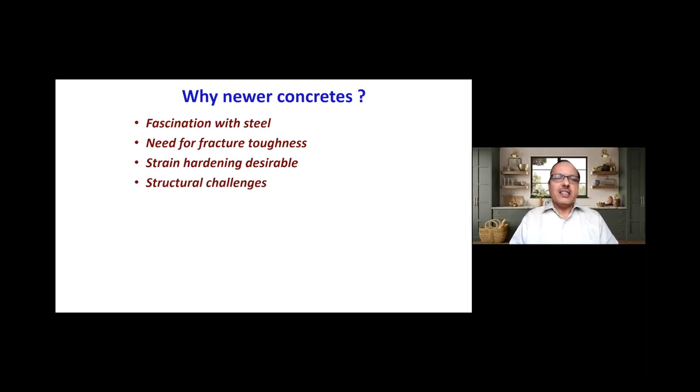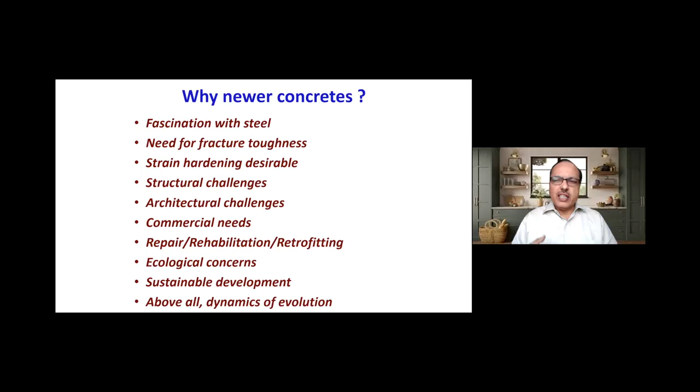We always have lots of structural and architectural challenges in our structures, and of course commercial needs is always a guiding factor. Today it is not only construction, but even repair, rehabilitation, and retrofitting of structures is an important component of our construction. Ecological concerns are important too - everyone wants green or eco-friendly constructions, so what varieties of concrete will cater to that? More than all that, we talk about sustainable development, and the dynamics of evolution ensure everything keeps changing. Change is the only constant in life.

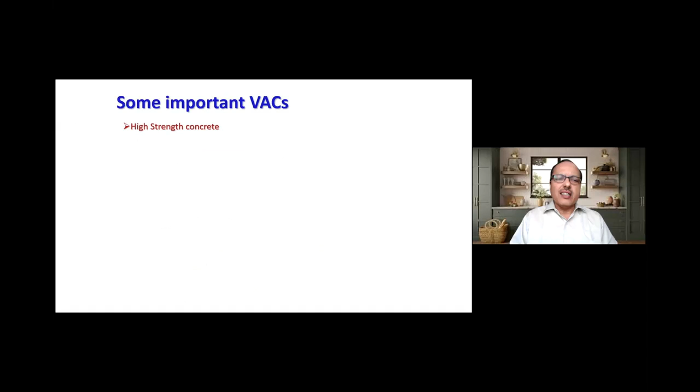There are several value-added concretes, that is what VAC means. I will not get into each one of them - there are so many varieties of value-added concretes. Some of them which are important for today's situation in construction, I will take you through.

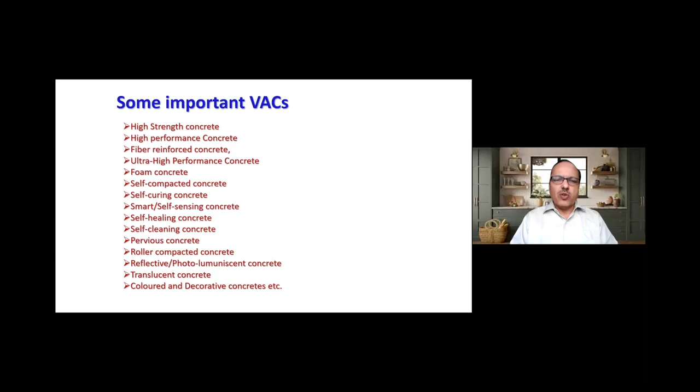Mainly, my presentation would focus on special concretes for structures related to housing and infrastructure projects. Infrastructure projects include roads and bridges and so on. Housing can be individual housing or mass housing.

Now let us start with the precast construction that we have today in the mass housing sector. A lot of precasting is happening in our construction these days, and particularly in mass housing its usage is increasing day by day. I'll take you through one of the very challenging precast constructions that we had some time back.

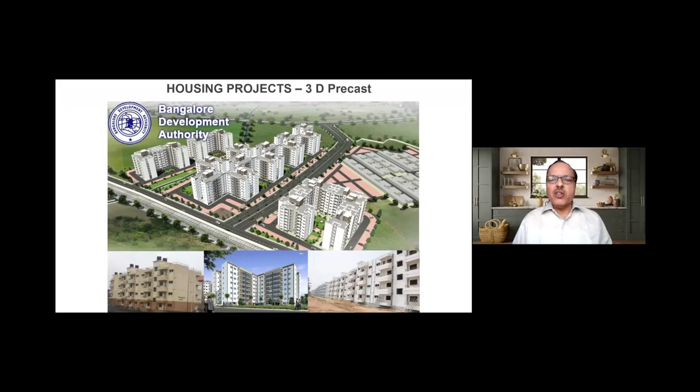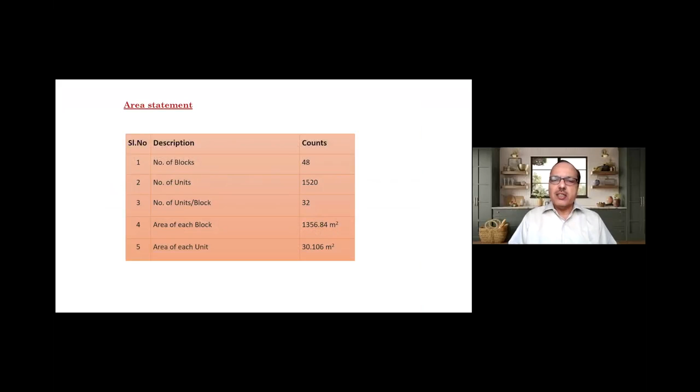BDA, the Bangalore Development Authority, two years back conceived the idea of coming up with 3D precasting. Two-dimensional precasting everybody knows - they thought of coming up with three-dimensional precasting. They wanted to build more than 1,500 houses in 48 blocks, 32 units per block, and roughly the area of each house was around 400 or slightly less than 400 square feet.

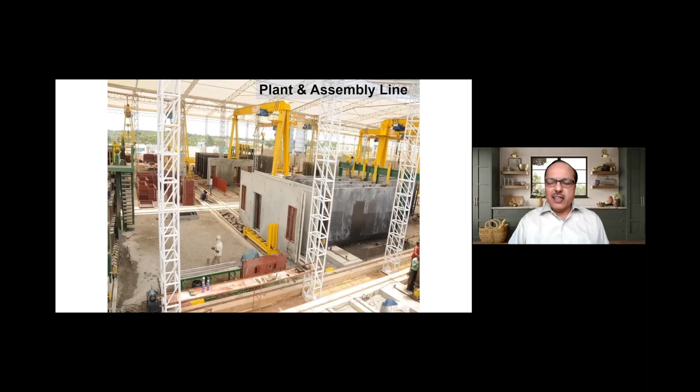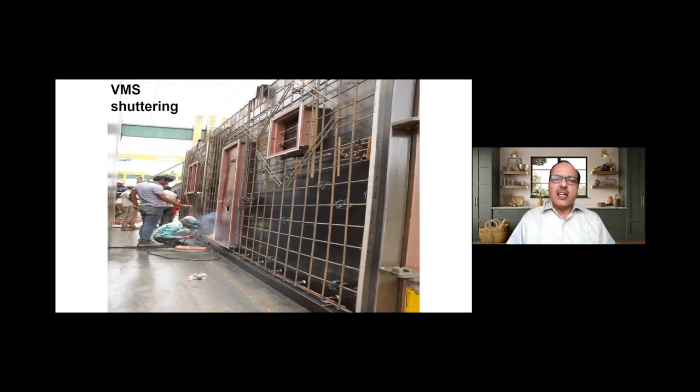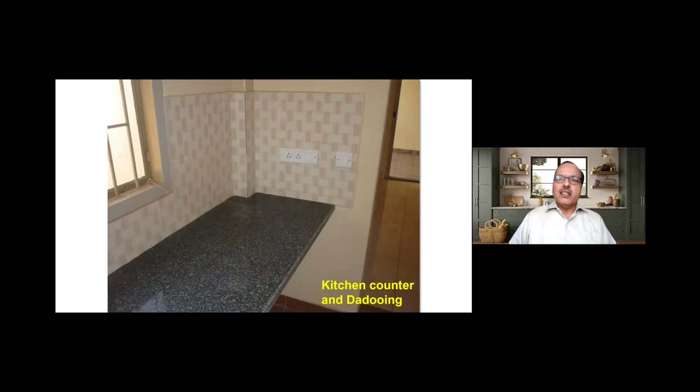This is a wall being constructed with single line reinforcement for the walls, normal reinforcement for the roof. Not only the basic construction, but also the kitchen slab, electric points, tile fixing - everything is done in the plant itself, in the factory itself. Even your washroom fittings and bathroom fittings are all fitted into this.

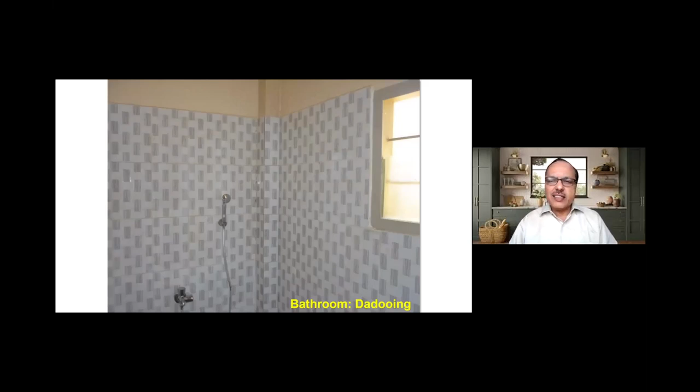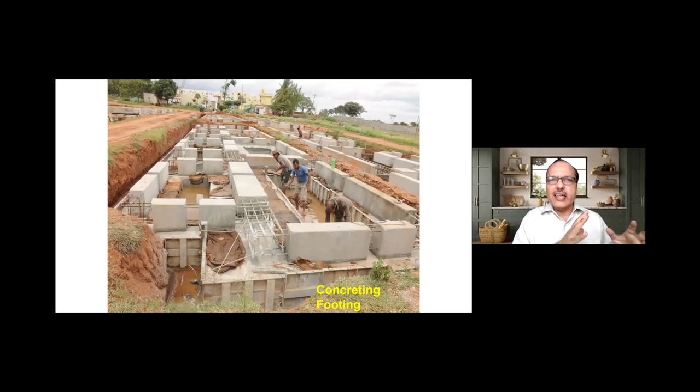Please note, this house is ready, but not ready at the site - it is ready in the factory. Now, how does it go to the site? When we are doing this construction in the factory, the substructure, that is the foundation, is constructed again using precast blocks which are transferred to the site, and the foundation is kept ready. Therefore, you have the foundation getting ready at the site while the house is getting ready at the plant or the factory.

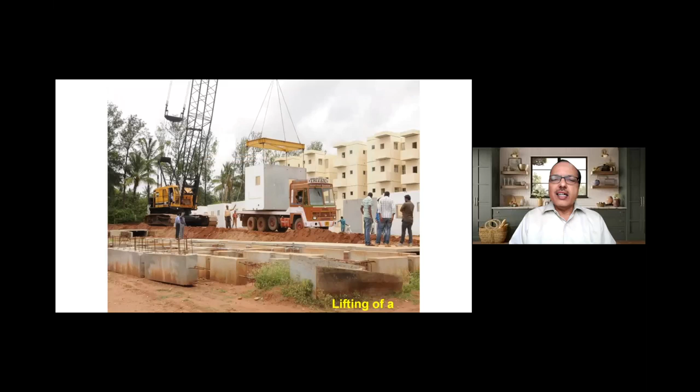Now parts of the house are transported part by part. Roughly about 180 to 200 square feet of the house is transported, and it is taken to the site, lifted and placed. Now what is important is this anchorage - when the structure is brought and fitted into the foundation below, how it is anchored is a challenge. There were a lot of challenges, but it was overcome with a series of trials. The requirement for concrete in this case is that it should get a high early strength so that we'll be able to handle it.

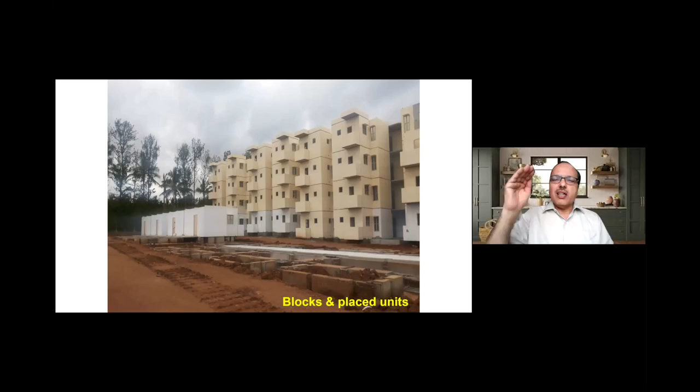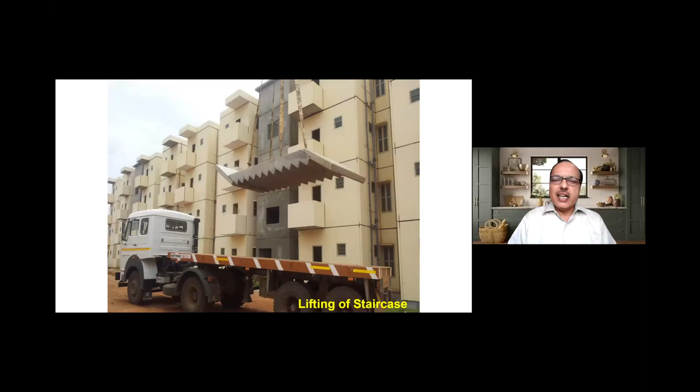One above the other, like a matchbox, the entire structure is ready and the blocks are all placed one above the other. The house is ready. Even the staircases are fitted like that - if it is a dogleg staircase, two pieces are brought and assembled, and within 2 hours the staircase is ready. This is the story of precast construction in mass housing projects, and you can see how fast things can be if it is done in a factory.

Now another way of construction is cast-in-situ construction. If you have in mind that precast construction is faster and cast-in-situ construction is very slow, this is one example of a mass housing project where cast-in-situ construction can still make it quite a fast project.

Before we get into the case study, let us look at the specialty of the concrete used here - what is called foam concrete. Foam concrete is not a very high strength concrete. It is a low density concrete, very easy to operate, very easy to pump. Its strength is hardly M15, and that is good enough because we are replacing brick walls with this foam concrete. If it has 15 MPa strength, that is much more than sufficient. It is a lightweight concrete - its density is not 2,400, it is hardly 1,000 to 1,200, and it can be brought down to 800 kg per meter cube also, one-third the weight of normal concrete.

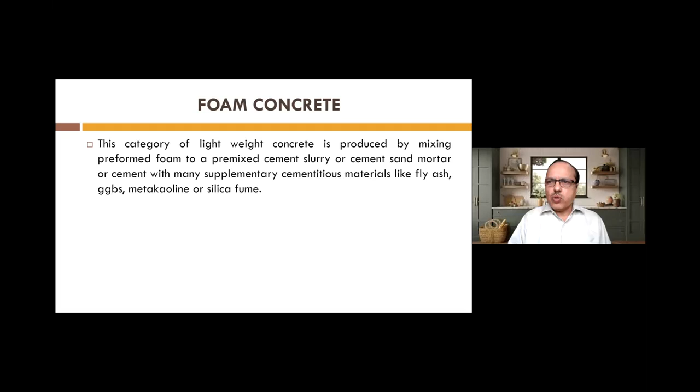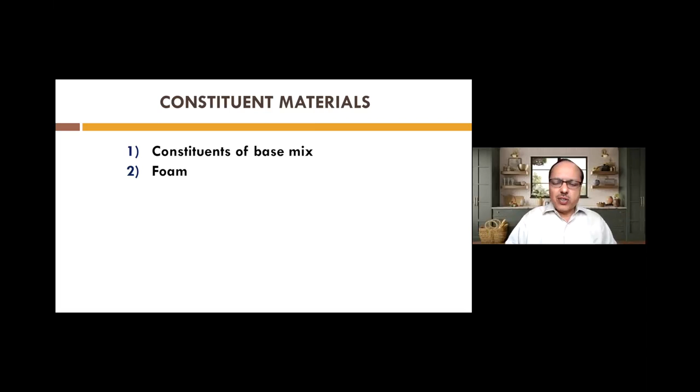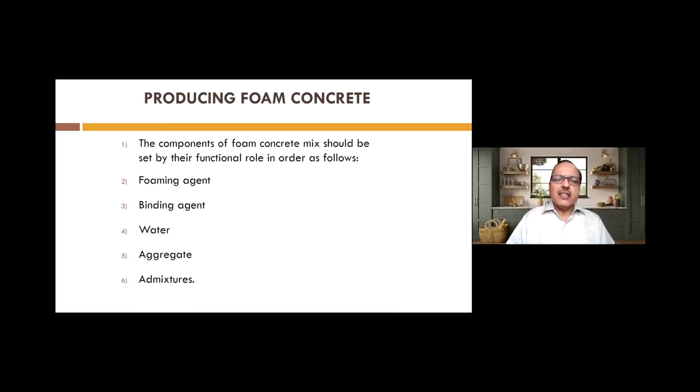What are the constituents of this? What is special about it? It has got a base mix very similar to normal concrete, and it has got foam added into it - that is why it is called foam concrete. The base mix is OPC or PPC added to make a good homogeneous mix. These are produced by adding sand and aggregates in the usual way, and the strength design is hardly for M15 concrete. Finally, you add a foaming agent, binding agent, water, aggregates, admixtures if required, etc.

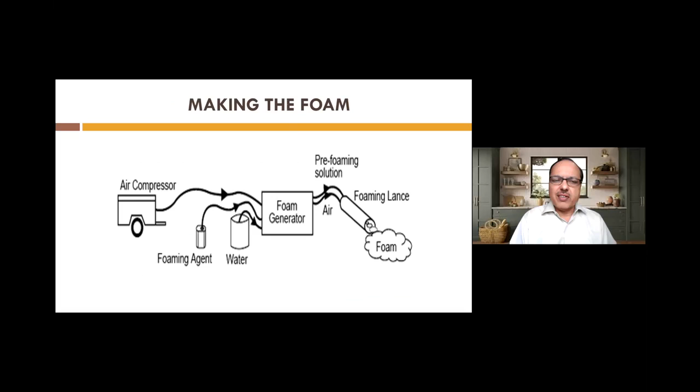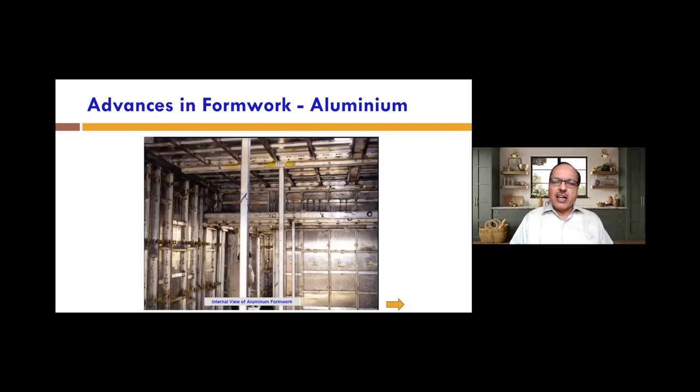Now let us come to the construction. Aluminum formwork and foam concrete make an excellent combination. Aluminum formwork, though initially expensive, can be reused nearly 200 times, which makes the total expenditure life cost analysis much more affordable. With this aluminum formwork the finishing is also very good, and foam concrete makes it an ideal combination.

This is the story of a ground plus 3-storied structure in Ahmedabad. The entire superstructure was constructed at the rate of 4 days per floor - 4 days per floor into 4 floors, 4 into 4 is 16. Simple mathematics - in 16 days the entire ground plus 3 superstructure was ready.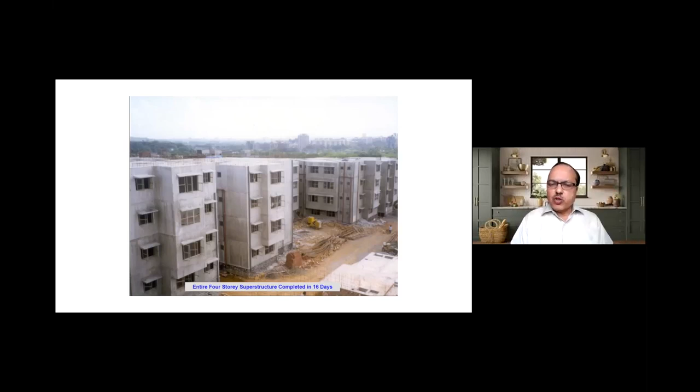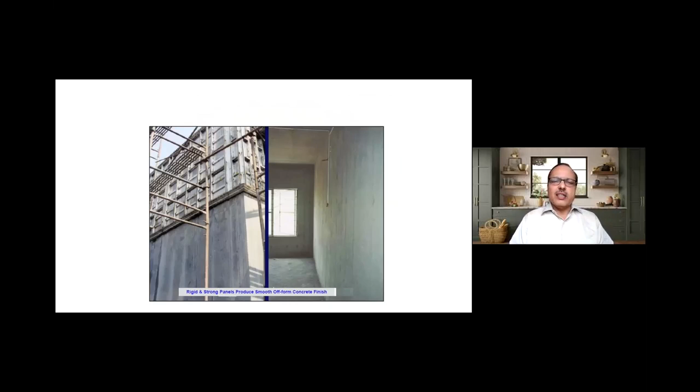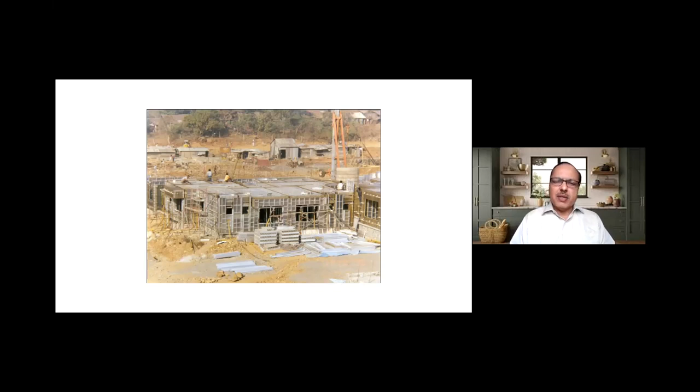Only electrical and sanitary fittings had to be done. How was this possible? Because it is aluminum formwork, the external face and the internal finish you get don't need plastering - it is a plaster-free structure. It is very smooth and doesn't require plastering, so you save a lot of time. The entire formwork is done by very few people, which is very ideal in the current situation where having trained, skilled labor is a very difficult thing nowadays. Therefore very few people can handle this.

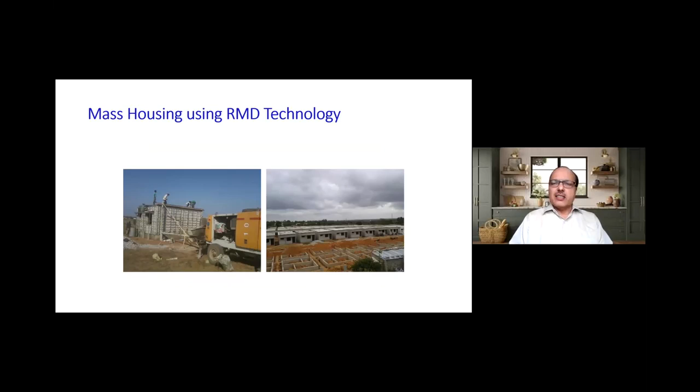I'll take you through one of the projects that we did, that Ultratech was involved in a few years back. That was in a village near Gadag.

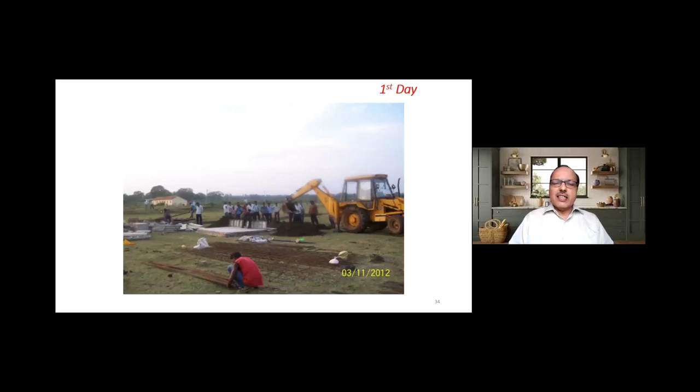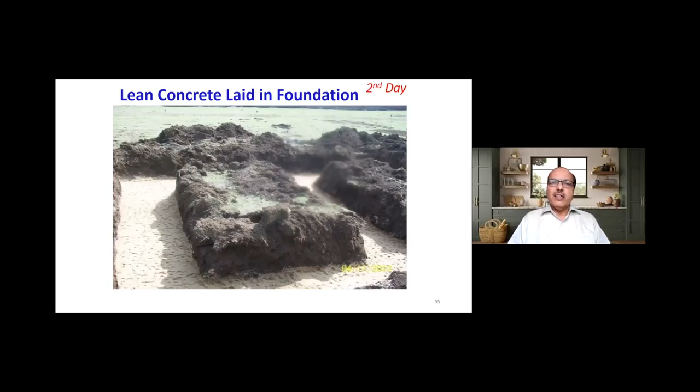Now this is the place where we started this work, and this was day one. Day one was excavation. Day two was laying the lean concrete foundation. And third day, it was foundation up to the plinth.

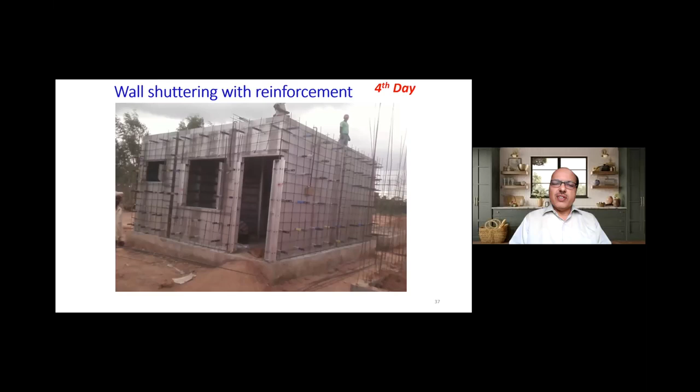Fourth day, aluminum shuttering and one layer of single layer reinforcement for the walls and normal reinforcement for the roof. The whole thing was laid. It is very easy to do that, very fast also. Half a day, the work was over.

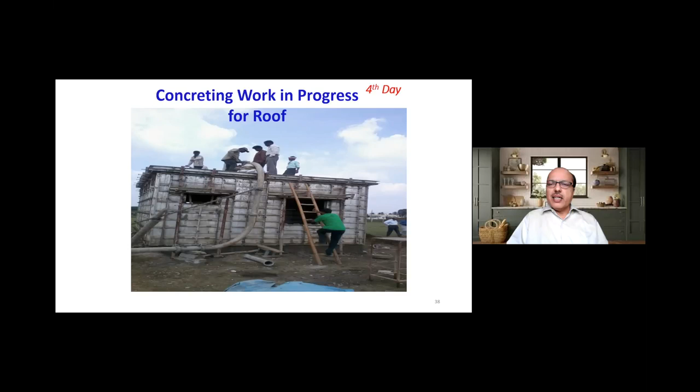Therefore, the entire box of concrete, both the roof as well as the walls, can be cast together. Therefore, it acts like a shell structure, a reinforced concrete shell structure. And because it is foam concrete, your concerns regarding the temperature inside, thermal conductivity, etc., are addressed. Foam concrete is much better as far as thermal conduction is concerned.

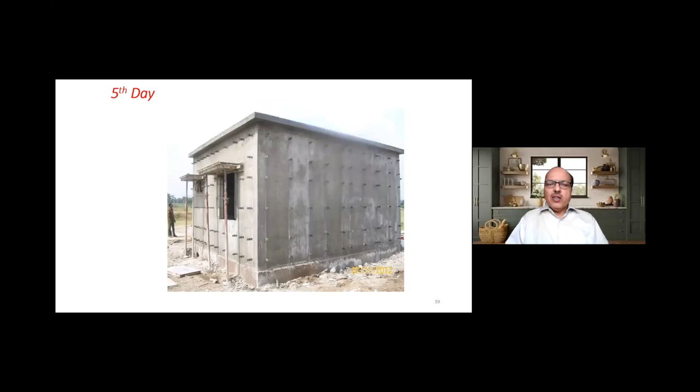Now this is the fifth day when all the side props are removed. Only the vertical props are remaining. Sixth day, the house is ready for opening. And seventh day morning, when the then Chief Minister came to the site to lay the foundation stone, he saw one building was already ready and he inaugurated that building.

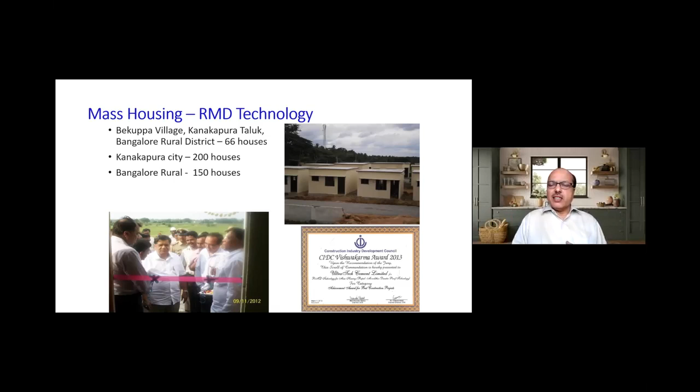And for promoting this fast construction technology, we also got this CIDC Vishwakarma Award. That was in 2013. Now, one more addition to this was done later on in the VBHC project Bangalore, where 1,800 apartments were constructed.

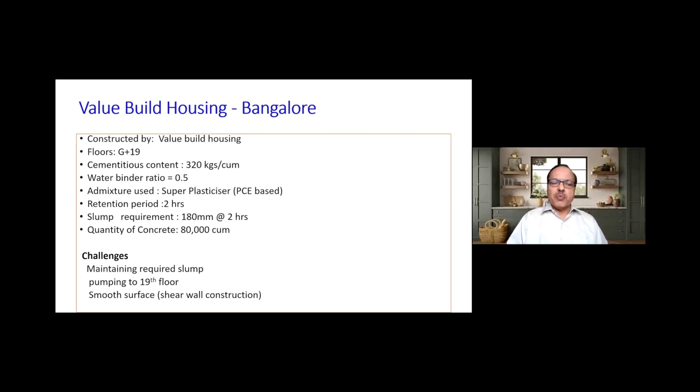The challenge here was also to see how much strength we get in one day. Therefore, the challenge was to maintain the required slump, because pumping of concrete was to the 19th floor, and also to ensure that a smooth surface is there for the shear wall construction. About 80,000 cubic meters of concrete was produced under this kind of condition or challenge.

So we used what is called a wireless maturity meter system. What does this do? When concrete is poured into its place, the formwork, the aluminum formwork, we also drop certain sensors. These sensors, when dropped into concrete, measure the maturity of concrete. This maturity of concrete can be gauged with the help of this wireless maturity meter system.

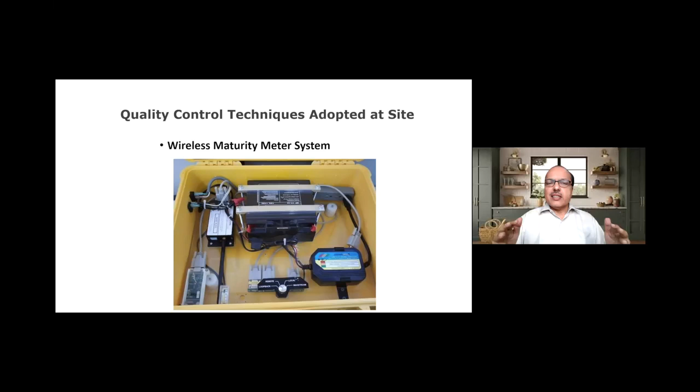It is a wireless system. You don't have to draw the wires, and it is captured at the office, and you can correlate it to the strength of concrete. That means these sensors inside concrete are able to tell you what is the strength of concrete inside.

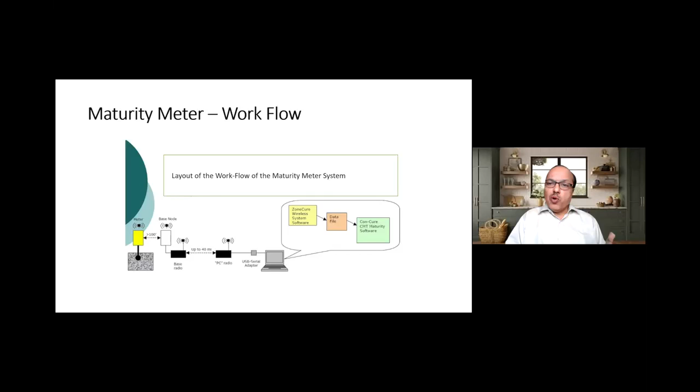Whatever we designed for 24 hours, we found that the concrete had already achieved the one-day strength in about 15 to 16 hours. This wireless maturity meter was able to tell us that in 16 hours, the strength is obtained, and therefore you can remove the shuttering and go to the next floor. This makes the entire system much more efficient than one-day strength. That is the additional thing we did in the VBHC project using the maturity meter.

Now let us move on to high strength concretes. From low strength concrete, we will now go to high strength concretes. High strength concretes are used in a lot of projects, particularly infrastructure projects, road projects. We use a lot of high strength concrete structures. I'll take you through some of these examples.

Why is it required? It is required for facilitating pre-stressed concrete construction. For stressing the concrete, it is required to have early day strength.

We need to have a flow of 450 millimeters. Slump is measured not in verticals but in horizontal flow. In 3 hours, it should have 450 millimeters slump. Now, it is not just one pour of concrete that we should ensure; all the 65,000 cubic meters of concrete should have this property.

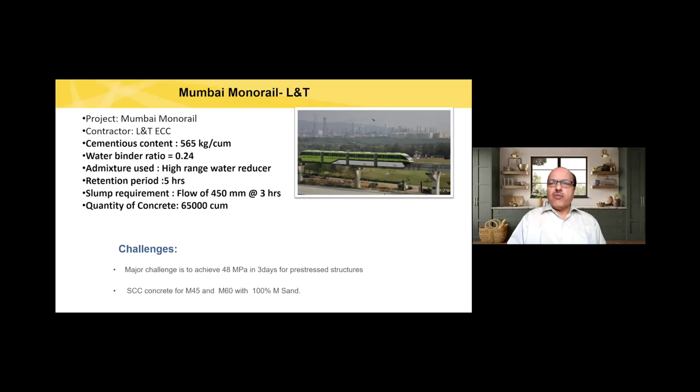And in this whole thing, M sand was used. I want to make this statement: M sand, a lot of engineers have apprehension even today, but there is no such issue. The only condition is that M sand should satisfy the conditions prescribed as per IS 383. It is very good for structures, and you will get consistent strength in the structures.

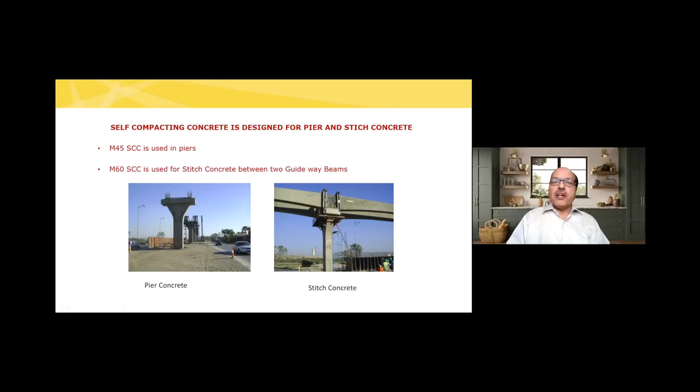This is the pier concrete for which M45 grade concrete was used. And for the stitch concrete between the two beams, the two guideway beams and the pier, you had M60 grade of concrete. That was the stitch concrete. It is a self-compacting concrete; M45 and M60 were used for this project. This is a finished project, very good finish and excellent performance.

Now, high strength concrete is all right. High rise pumping concretes - now we'll have to pump concrete to great heights. All of us know that Burj Khalifa is the best example we have till now, where concrete has been pumped to a height of 550 meters, that means more than half a kilometer's height.

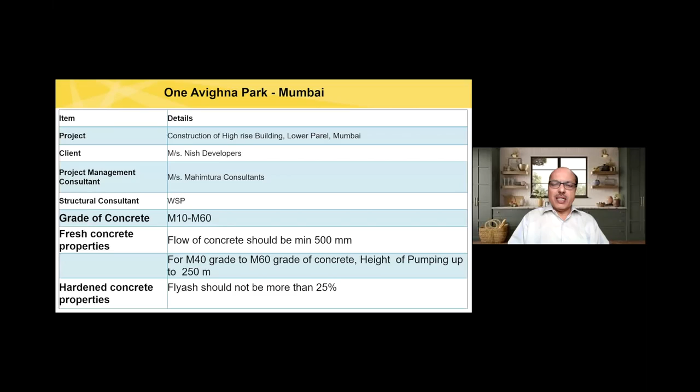But in India, right now, the record pumping is 250 meters, that is 1/4 of a kilometer. The example is this Avighna Park in Mumbai, where different grades of concrete from M10 to M60 were used. Flow of concrete was 500 millimeters, and with about less than 25% of fly ash, concrete was made, with about 595 kg per cubic meter.

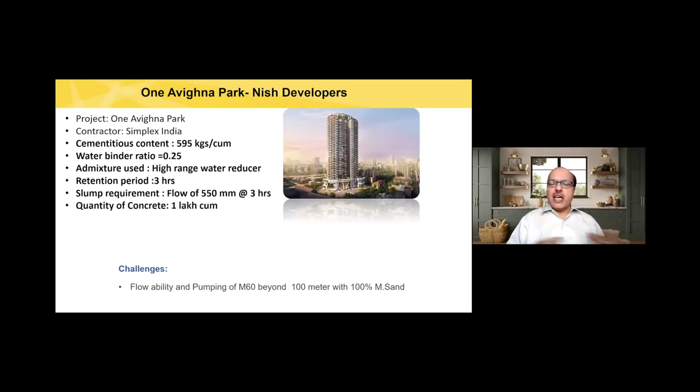The challenge here is that flowability should be so high, more than 500 millimeters after 3 hours, so that we should be able to pump it beyond 100 meters with 100% M sand. This was possible to make. And what was the quantity of concrete? 1 lakh cubic meters of concrete with the same kind of property. It is now possible to make with the mechanization that is available.

Now, another example of high strength concrete is for roads. Concrete roads - there are a lot of concrete roads, and white topping is becoming very popular in many places. White topping, those in Bangalore and Mumbai may say it is taking a lot of time, but let me assure you, the time taken is not for making the concrete road itself, but for all other reasons other than making the structure.

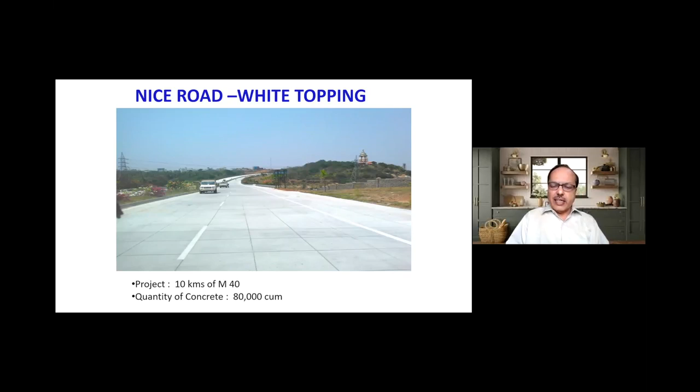Now, this is the quite well-known NICE road. Those familiar with Bangalore must be aware of this - the outer periphery road, that is NICE road, which is made with M40 concrete. About 80,000 cubic meters of concrete was used for about 10 kilometers of that. M40 grade of concrete with fibers.

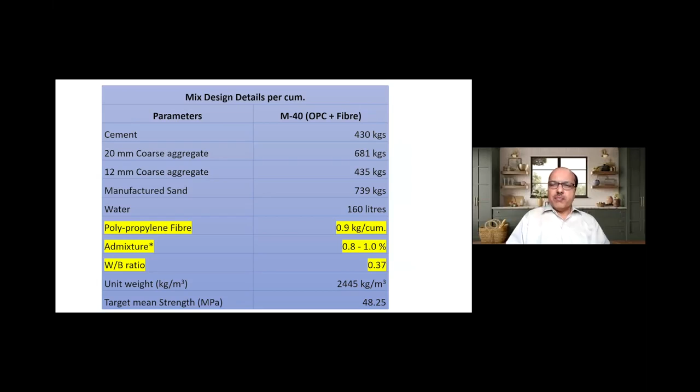In case of concrete roads, please note, fibers are desirable - I would say essential, at the rate of 0.9 kg per meter cube, so that it helps in the control of cracks. Otherwise, plastic shrinkage cracks - you will see a huge number of such cracks coming up on the structure.

Now, this is about cast in situ concrete. Concrete can be made just like in housing, concrete can be precast also. If you make it precast concrete, which is not very popular in our country, it is possible to make it precast, pre-stressed concrete pavement. The great advantage is that the pavement components are made in the factory, brought to the site, and assembled.

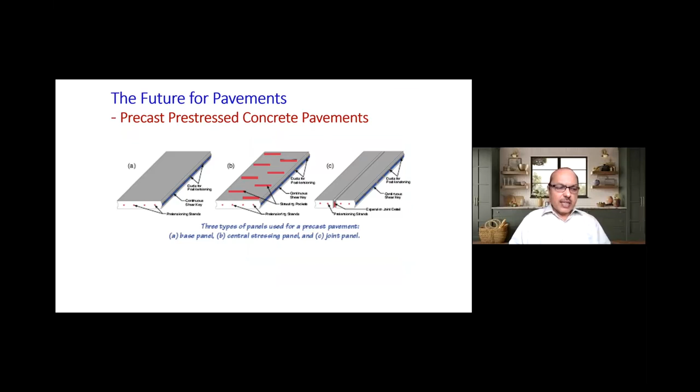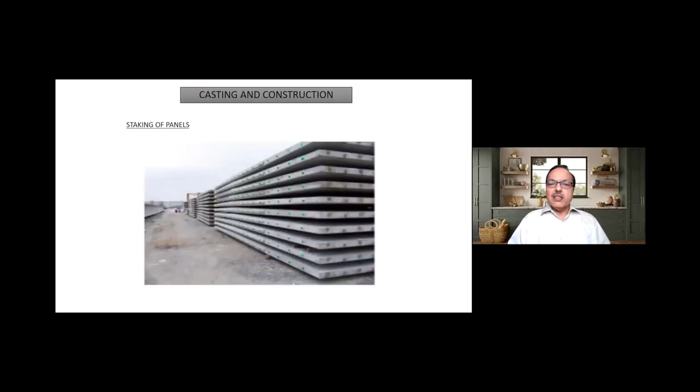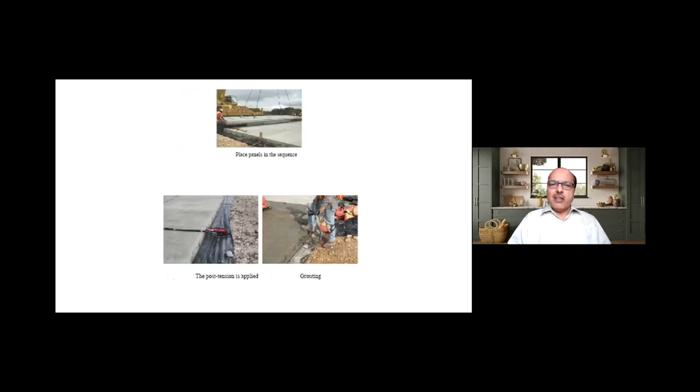Now, this is a story of a road which was closed for traffic in the late evening, and within 12 hours - because these panels were already ready, kept by the side - they were just assembled, the joints were completed in the morning, and grouted, all the joints were grouted, and painting was also done in the factory, and the road was opened within 24 hours.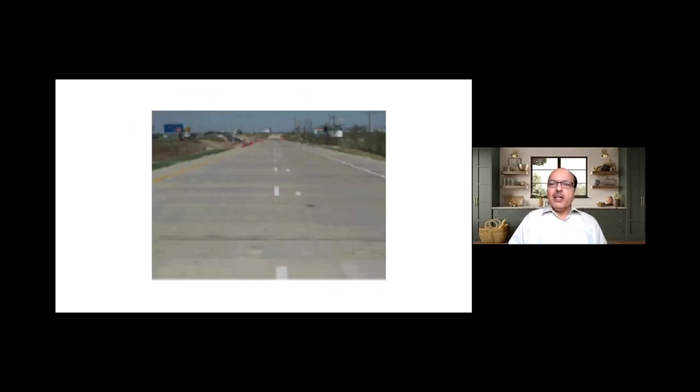This was in the US. Now this was a story somewhere else. In India, we were always feeling that precast concrete roads have not happened, but the very first road has already come up in Nagpur.

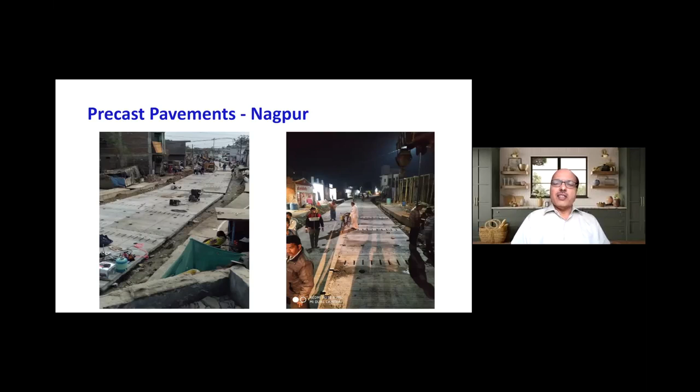These are photographs taken during construction. This small stretch of road, 400 meters, in a very busy, narrow stretch, has been done with precast concrete pavement. The concrete slabs were cast in the precasting yard, then brought to the place, and there were joints. You can see where the dowel bars are placed.

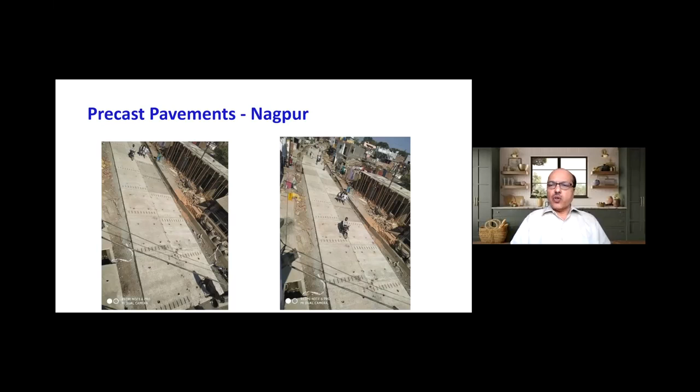They were all grouted, and the road was opened to traffic. It was not done in 12 hours, because this was the first experiment we were involved in, and the precasting people and the people assembling it took 2-3 days. But still, a concrete road that can be made in 1 or 2 days is an excellent thing. I am very sure these kinds of roads will come up, and discussions are going on for one such stretch of road in Bangalore also, which will come up very shortly.

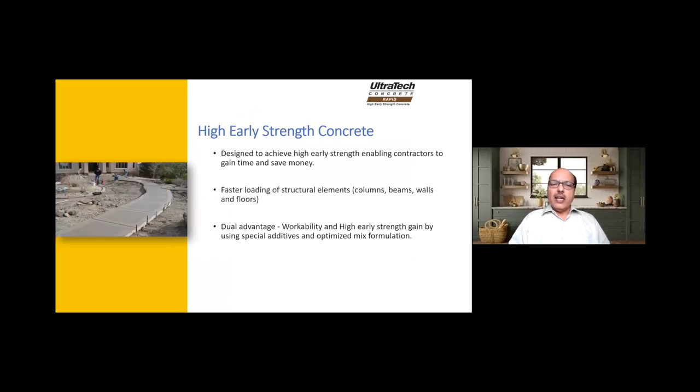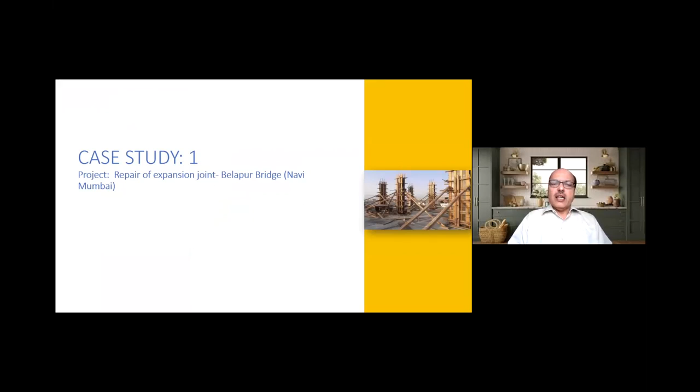Now, getting back to concrete for the repair segment, which should have very high strength, very high early strength. How early should it be? It's in terms of hours, not even days - 1 day or 12 hours. I'll take you through the case study of the joint repair of the Belapur Bridge in Navi Mumbai, which faces very high traffic, and the challenge here was to achieve 35 MPa in 24 hours.

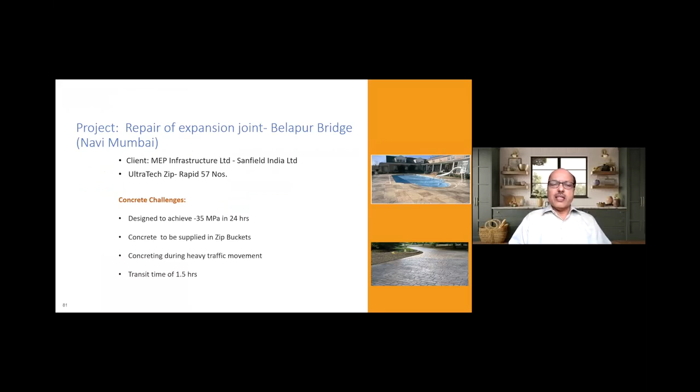Therefore, we used what is called zip concrete or rapid concrete, which was used in buckets. The early strength was achieved in 24 hours - we designed it for 40 MPa of strength in 24 hours.

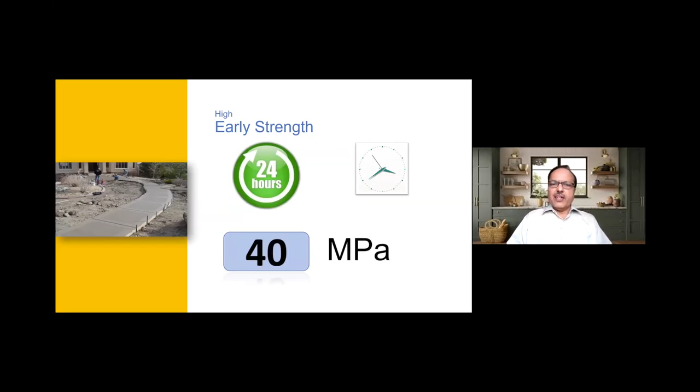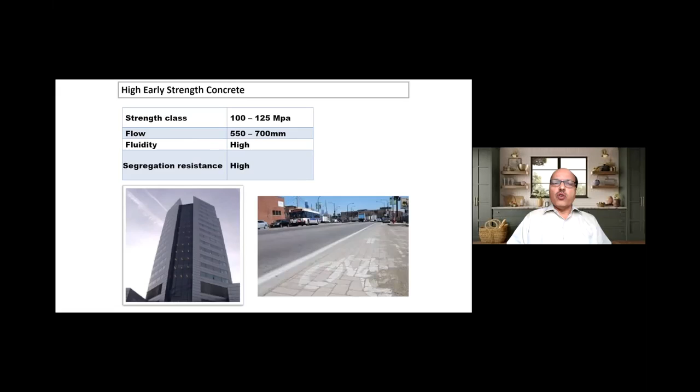Now, another class of concrete is to get more than 100 MPa, 100 to 125 MPa concrete with high early strength. It should have good fluidity and also segregation resistance. These can be used for several applications in infrastructure projects.

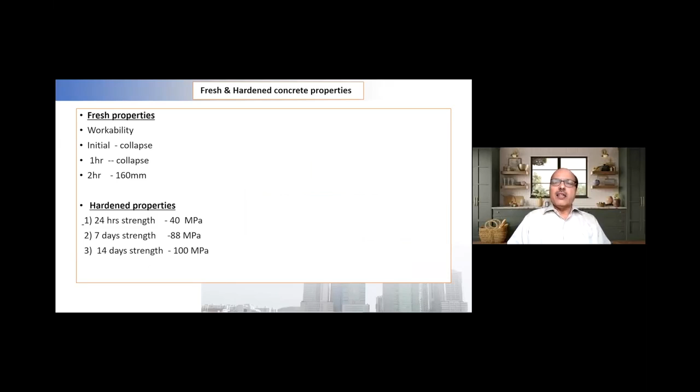What are the properties of this concrete? In 24 hours, it gets 40 MPa of strength, and in 14 days, it crosses 100 MPa. Therefore, in 28 days, it can reach about 115 MPa strength also. It has good strength, good workability, and good durability. This has been tested in a third-party laboratory also, and that was an excellent success.

Therefore, in India, making M100 concrete or M125 concrete is a reality. It is possible to do that. It has been done, and therefore it can be done.

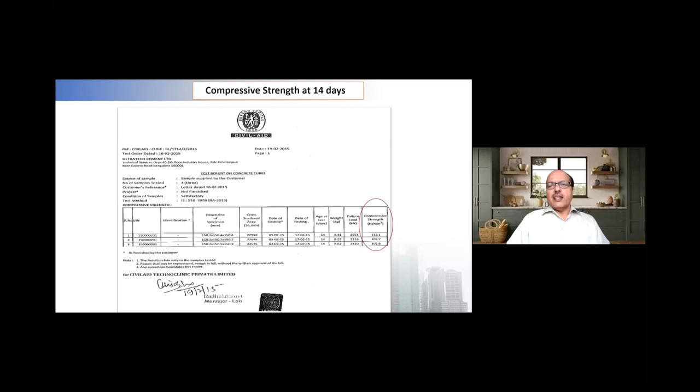Now, one of my last examples: if you are supplying concrete to a very inaccessible location, a very hilly area where the road is being constructed and you don't have a road to take concrete there, but you have a running river - this is the example of a floating batching plant across the Brahmaputra Bridge in Jogighopa, Assam. The entire batching plant was put on a barge and floated on the river. It went to the site, and near the site, concrete was made and pumped for construction. This was the best example for supplying concrete to an inaccessible location.

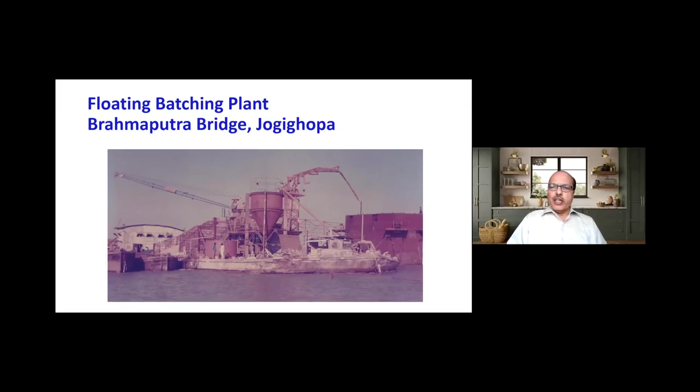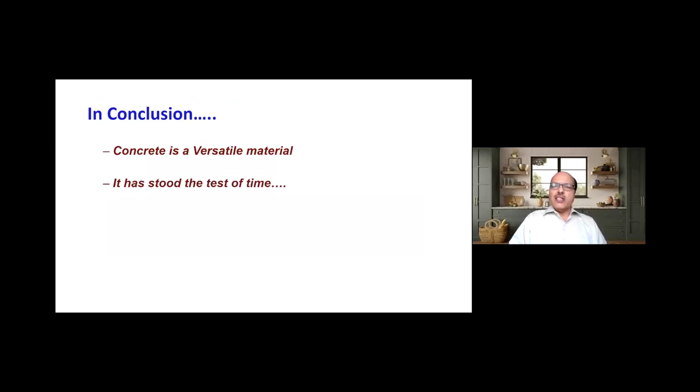Friends, with this, I would like to conclude my presentation. Though I have included very few cases because of time constraints, in conclusion we can always say that the challenge today is to produce concrete or make very good structures within a short span of time. It is possible to make such concrete because concrete is a very versatile material and it has always stood the test of time.

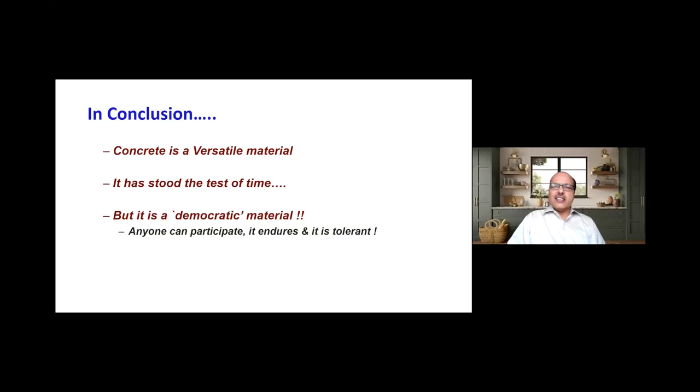I would also like to end by saying that concrete is a democratic material. Why do I say this? Very much like democracy, concrete is something where anyone and everyone can participate - semi-skilled, unskilled, skilled. Everyone makes concrete in our country, and it endures and it is also tolerant, just like democracy. Therefore, friends, with this I would end my presentation.